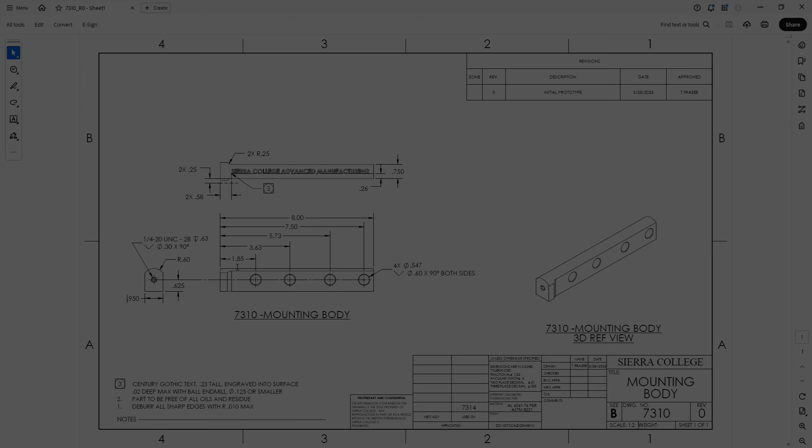Hello, this is the video tutorial for modeling the mounting body in Fusion 360, part number 7310, revision 0. We're going to model this part, which is part of a vise stop assembly.

We're going to model this in Fusion 360. Let's look at this part. It is an aluminum extrusion part, flat on two faces, has an end and a mounting point, and then a series of holes that mount to the back of different size vises with different hole patterns. This should fit, I believe, a 6-inch and a 4-inch standard mill vise.

So we're going to start off. I think the easiest thing to do is make an extrusion, and we could either extrude the end view and cut these sides out, or extrude what we see from the end and cut away the top. It's kind of semantics. I'm gonna opt for the second scenario, and we're gonna model this profile, extrude it, and then come back and cut this radius off on the top.

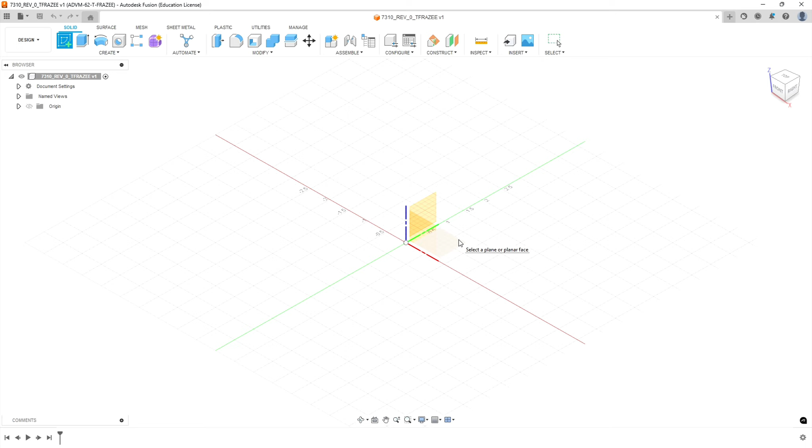So we're going to make a sketch. We'll go ahead and do that in the top view, because that's how it was in the drawing we have.

Okay, we're going to start off with the line tool. We're going to start at origin. We're going to go left. We're going to click and hold the button down so we can make an arc. Make that arc, lift up, go left, up, down, across.

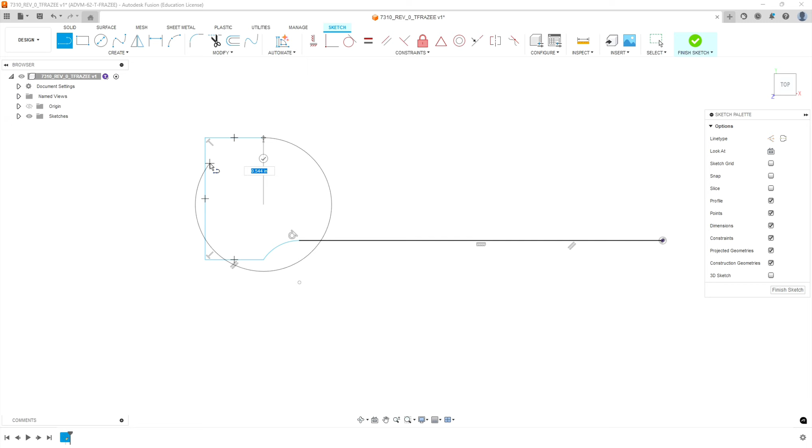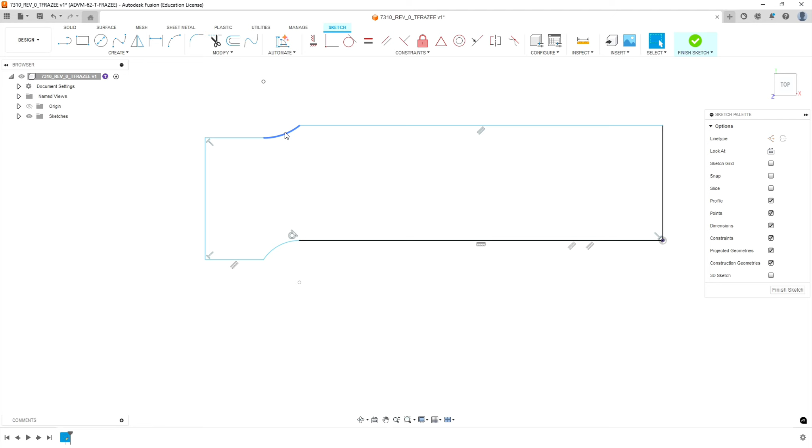Now it's defaulting to a tangent arc. We don't want that. But we can fix it. We just go back and make this shape. Let's take away the tangency where we didn't want it. Should be able to drag our arc down.

Click on the arc, click on the line, and we're going to make those tangent. Okay, so that's the basic shape.

We want to put a dimension on one of these arcs. And according to our drawing, that arc is 250 thousandths.

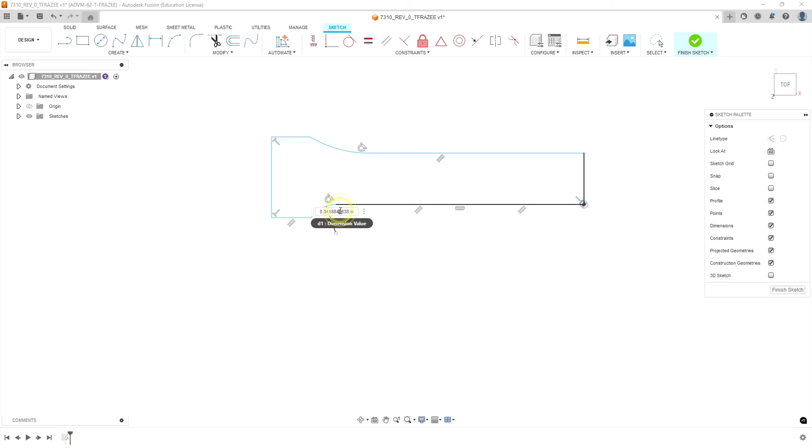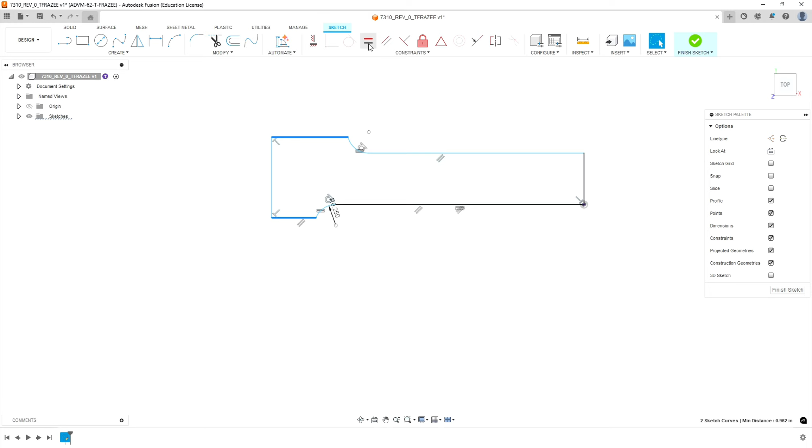Okay, and now we can go and highlight both arcs by holding the shift key down. That allows you to select multiple things, and we're going to make those equal in size. Then this horizontal line that I've just highlighted and the second horizontal line, we also want to make those equal in length.

Okay, the distance from the end of the block to the arc center is 0.58. And then we're going to put in our thickness here on the right hand side, which is 3/4 of an inch, or 0.75.

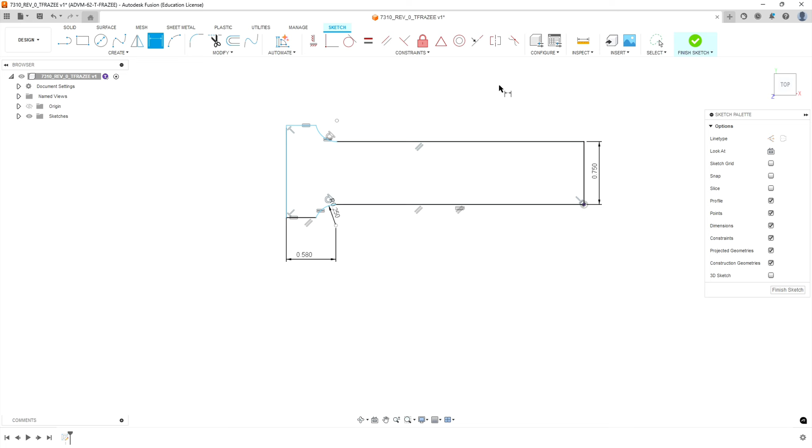And then we need to dimension the end, and that height is shown in the left view as 950 thousandths.

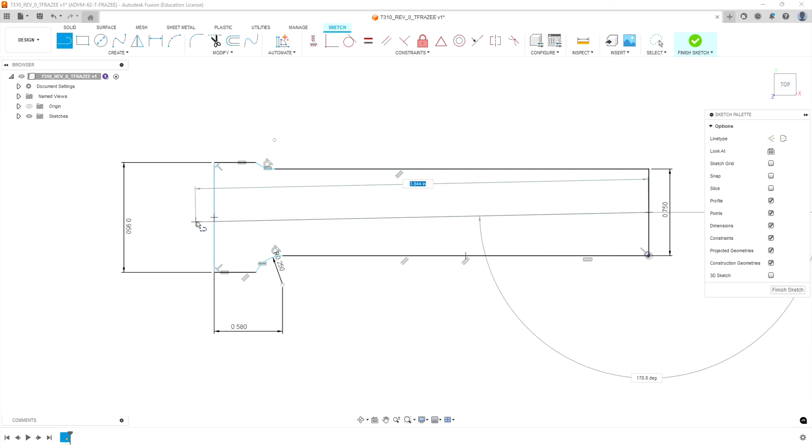Okay, so now we're going to put in a relationship. We want the center of this right line and the center of the one on the left to be horizontal. So I'm going to put a center line in here. We're going to create a construction line and then force that line to be horizontal. That'll evenly space our part here.

And the only other dimension we have left is the overall length, which is 8 inches.

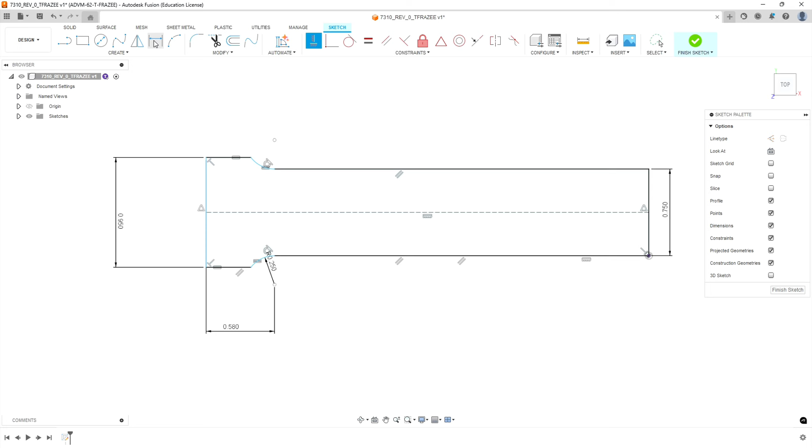Okay, so if we expand our sketches on the left, this should have the little padlock symbol, meaning it's fully constrained. You don't necessarily need all the dimensions on the drawing itself, provided it's fully constrained and the critical dimensions are there. And now we're going to extrude this.

So our part is 625 to center, and then the arc that's centered on that is 0.6. If we add those together, 0.6 plus 0.625 gives us a little under 1.25 inches. So we're going to go ahead and make our extrusion 1.25 inches because we're going to be cutting off the radius on that. So we need a little bit of material there.

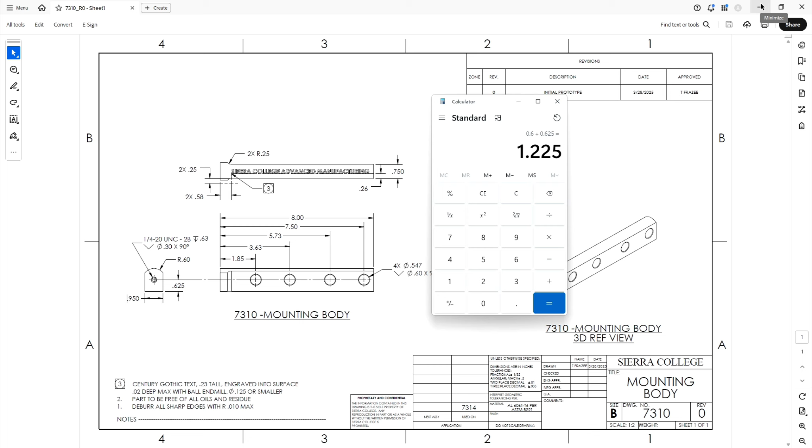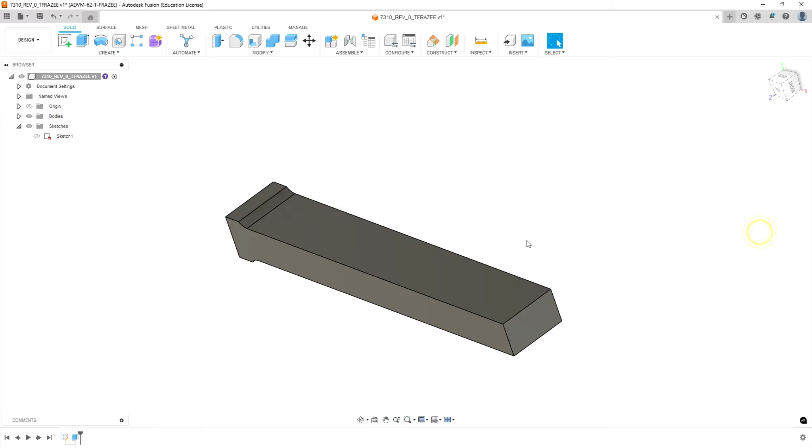So we're going to go finish sketch, we're going to extrude, and I like to go to a 3D view at this point, and we're going to go a distance of 1.25. And hit OK. So we've got our initial extrusion.

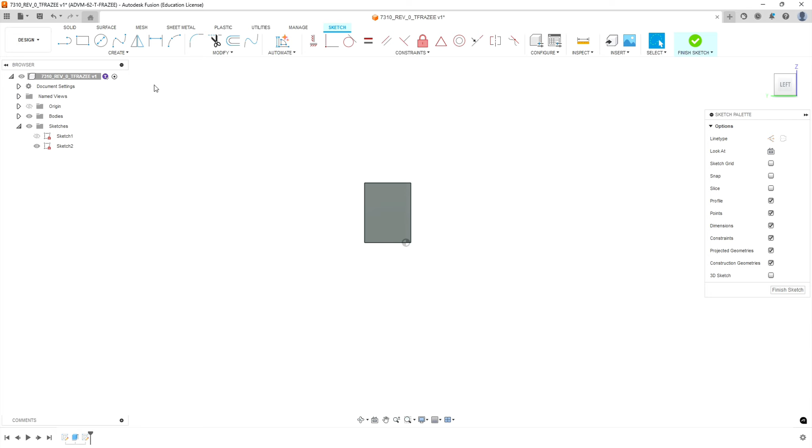Right now it's more or less a symmetrical piece. Now we're going to cut our round in the top. So let's look at it from the larger of the two views, and we're going to sketch on that face, and we're going to go ahead and draw a circle, and we're going to place that circle on the surface, hit escape. We're now going to create a line from center of the top to the center of the bottom.

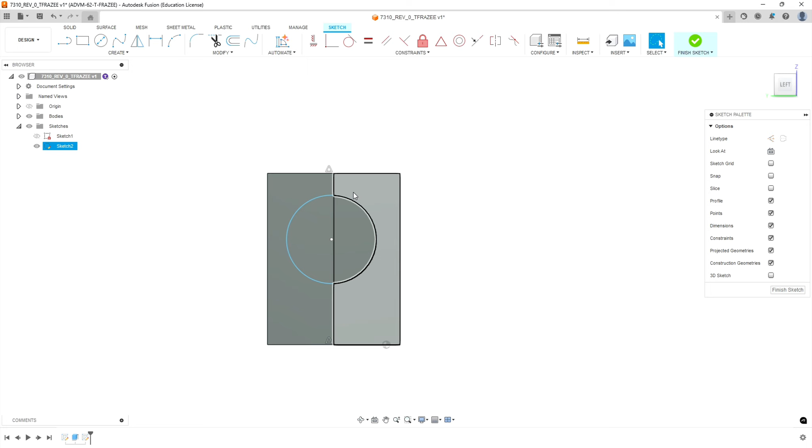We will make that line we just created a construction line. Then we're going to select on the center of our circle and hold the shift key down, select our center line, and we're going to make those two coincident. We don't want it on midpoint, we want it coincident.

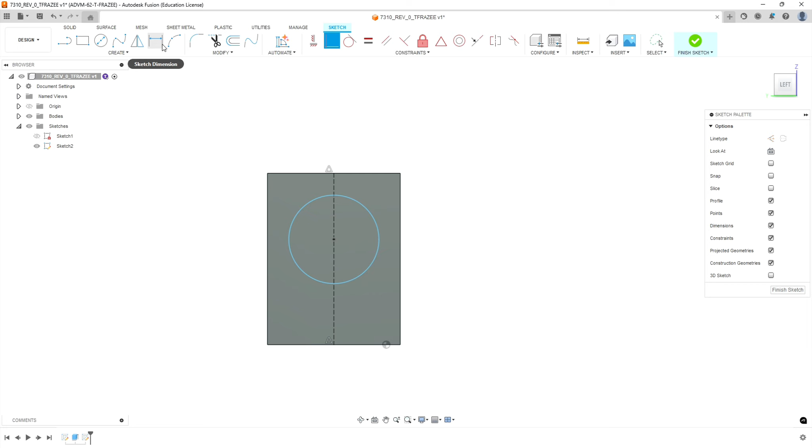And then we need to put the dimension from center line, center of the circle to the base of the part, which according to our drawing in the side view is 0.625 or 625 thousandths. So we're going to put a dimension from the bottom edge to center of the arc or circle, and it's 0.625.

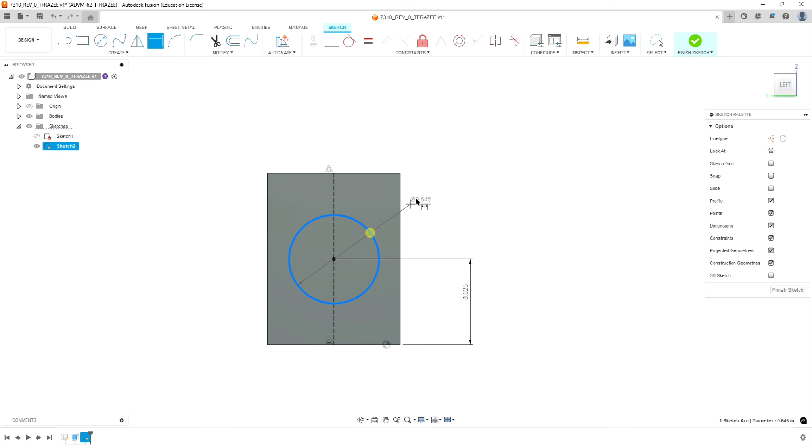Alright, now we need to set this diameter. According to our drawing, it's 0.6 inches. So if we were to dimension this with a diameter, it's double that. So 0.6 times 2 is 1.2. And that gives us the arc we need to make.

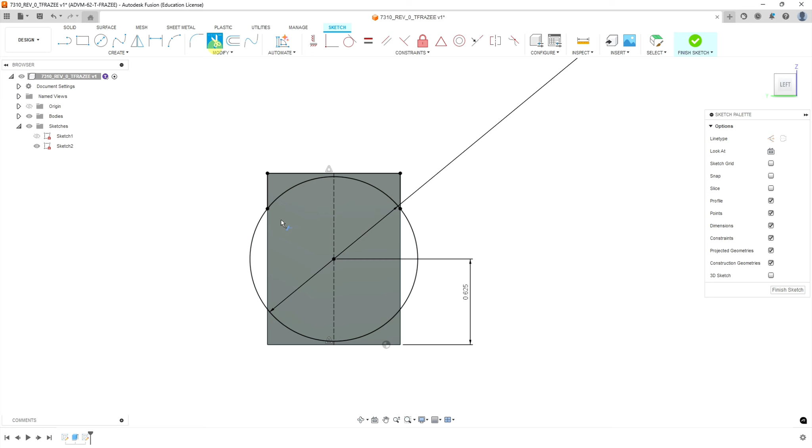Okay, so now we're going to sketch the zone we want to remove. There's a couple ways we can approach this. I'm just going to draw some lines to the model itself and intersections. And then we're going to trim off what we don't want. Now in Fusion you don't necessarily have to do that. It allows you to select zones, but it's a habit I'm in.

And it looks like I accidentally deleted my dimension, so I'm going to go ahead and put my radius back in there. And at the moment, this can be canted right to left. So you can either make a horizontal relationship between these endpoints, or you can make the legs that we drew equal in length, and that'll balance this out.

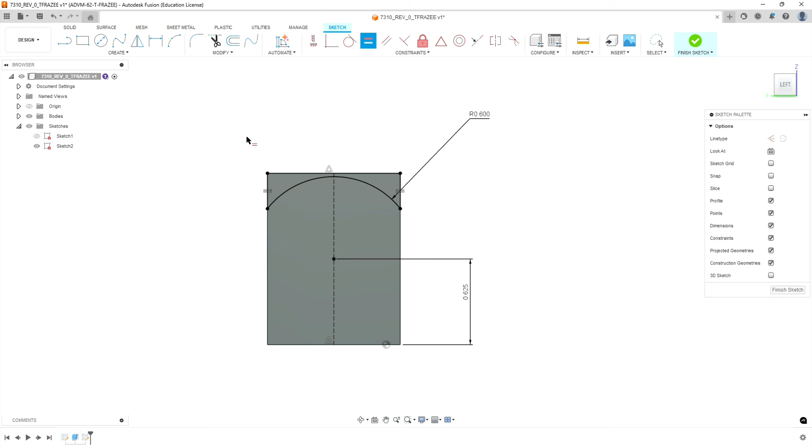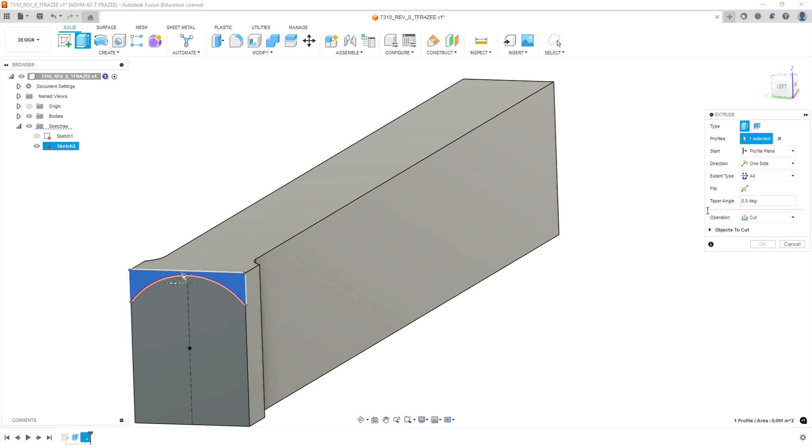We now have a fully constrained sketch. We can hit finish sketch. Let's go to a 3D view, and we could do an extrude or a press pull, but we're going to do an extrude, and we're going to select the section we want to use. It's going to be a cut, so we'll change it to a type cut. It's going to go one side, it's going to go through all, and we'll flip the direction of it. So in red it's rendering what it's going to remove, and we'll hit OK.

Okay, so we got our domed top on the part. Alright, next we have a series of holes that go through the face of this.

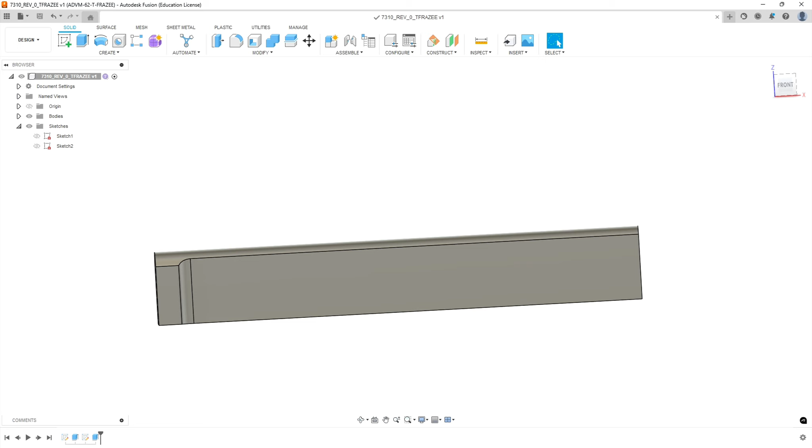So what we're going to do is take a look at that. We have 1, 2, 3, 4 holes, 4 times. They're 547 thousandths in diameter. They have a chamfer, we're going to put that on later, the chamfer tool for the countersink. But let's do these holes here. They're aligned with this 625 thousandths center line here. So let's put that in.

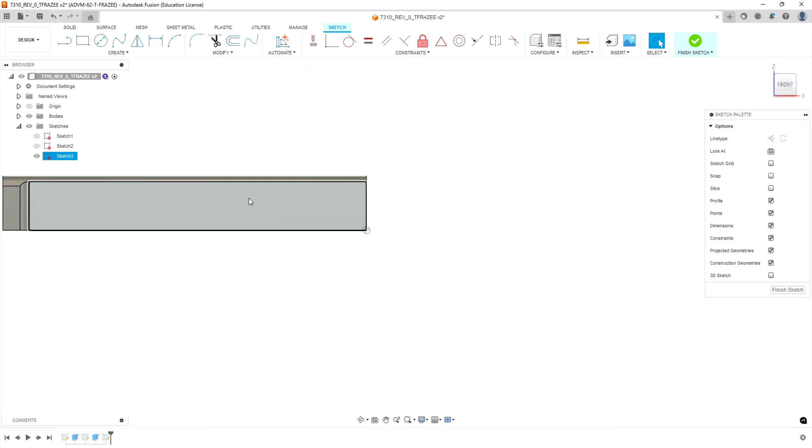So we're going to sketch on the flat face of the part. We're going to make a line from one end of the part to the other.

We'll go ahead and make the line coincident with the edge that projects. And then since we don't want this to be real geometry, we pick on the line and make that construction geometry.

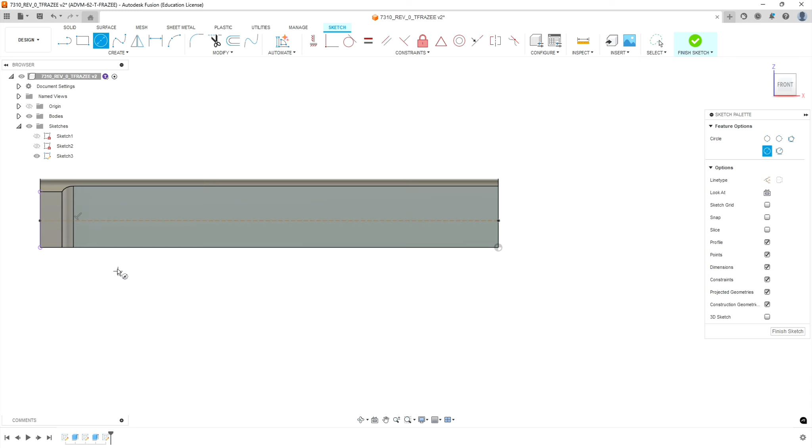Now let's draw our circles. We're going to draw them on that line we just made. You can somewhat make them arbitrary in size. At the moment, there's 4 of them.

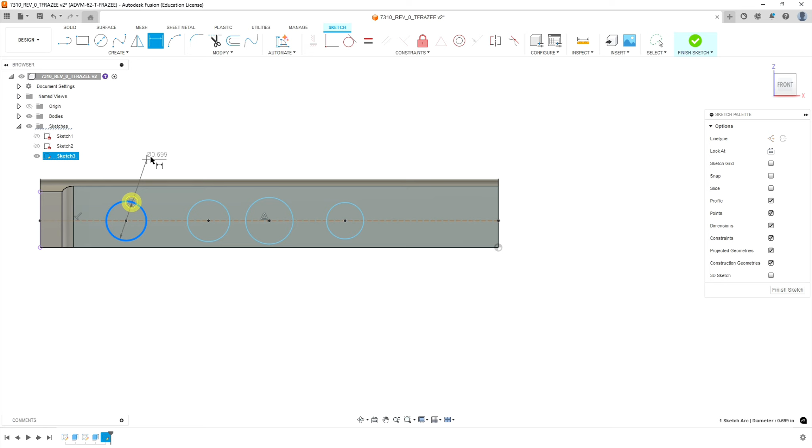Let's dimension one of them, its diameter, which according to our print is 547 thousandths. So we're going to dimension the first one, 547 thousandths. It shrinks up. Hit escape to get out of the dimension tool.

Then we're going to highlight the circle we just dimensioned, hold the shift key down, and highlight the rest of the circles and create an equal relationship between them, so they're now all the same diameter.

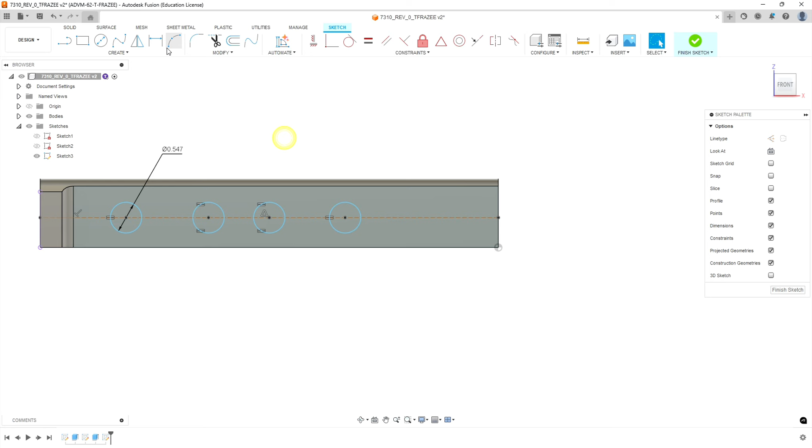Now all we have to do is put them on this center line we have here, but right now that center line can float. We need to put a dimension from the base to the center line, and it is 0.625, 625 thousandths, from the bottom, which is where that row of holes sits.

We're going to go to the mounting body, going from left to right. We have a 1 inch 850 dimension, let's put that one in, from the edge of the part to the center of the first circle.

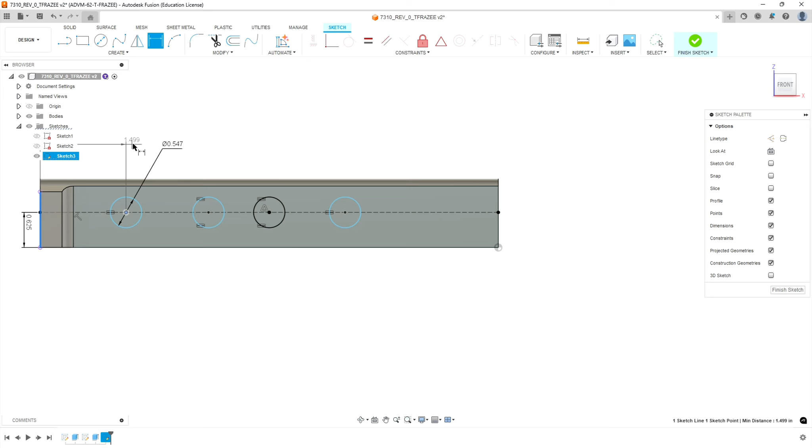1 inch 850. Looking at our next circle, it's 3 inches 630 from the end. So we're going to go from the end of the part to the center of the second one: .63.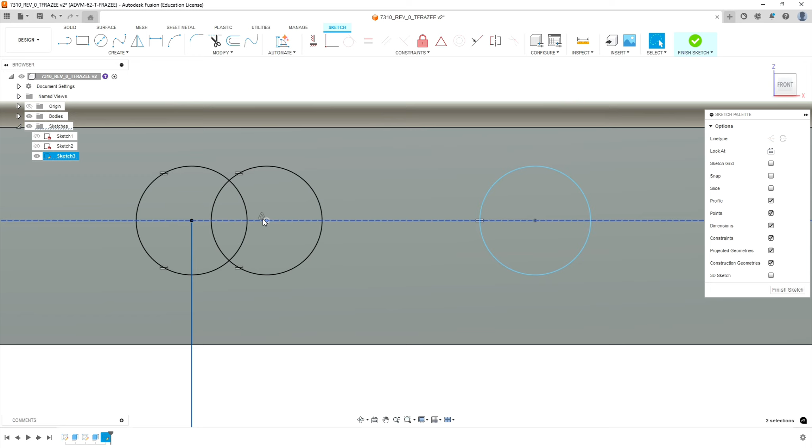Alright, our next one is going to go from the same edge of the part to the center of the next one. Looks like I accidentally got a midpoint relationship I didn't want. If that happens, just highlight the relationship and hit delete to remove it.

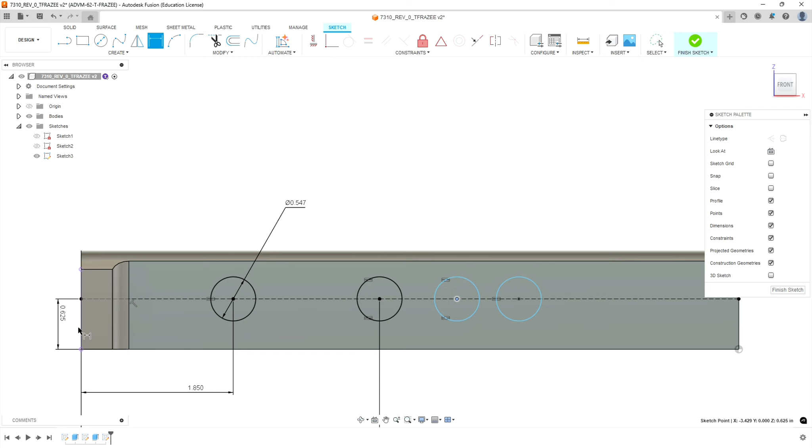We go back to the dimension tool and make a dimension from edge of part to center of the hole. This dimension here is 5 inches and 730, so 5.73.

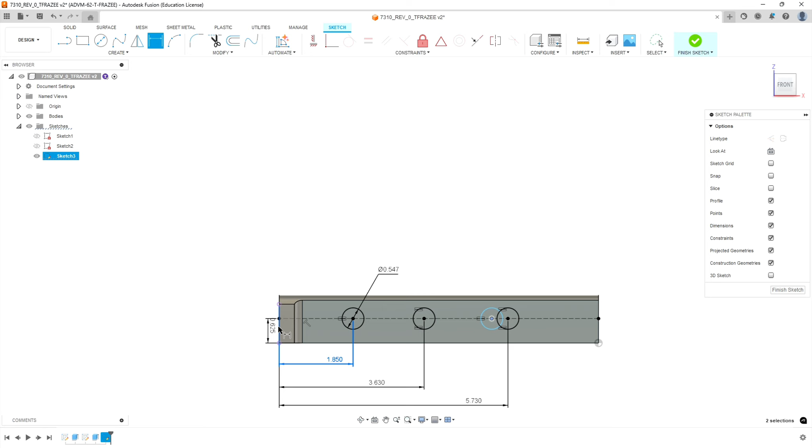We just have this last hole here. Go from there to the center. According to our drawing, that last one is 7 inches and 500 thousandths, so 7.5.

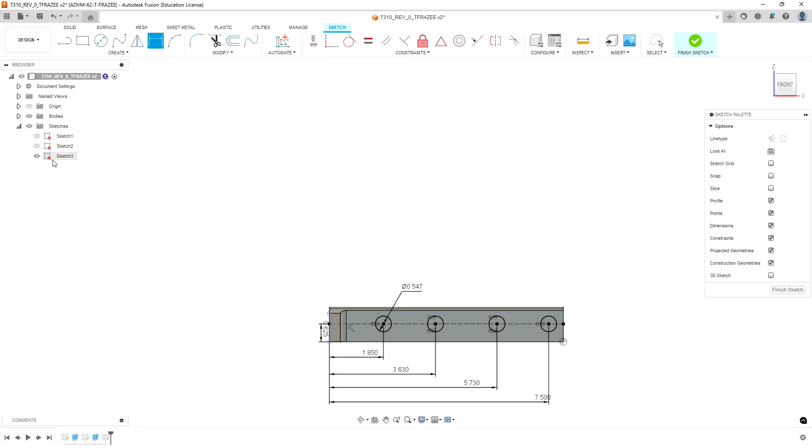Okay, so that's all our holes and their centers, and if we look to the left, our sketch should be fully constrained. We're going to hit finish sketch.

We're going to do another extruded cut, picking inside each of these zones of the circles, telling it we want to modify what's inside that circle, and we're going to do through all.

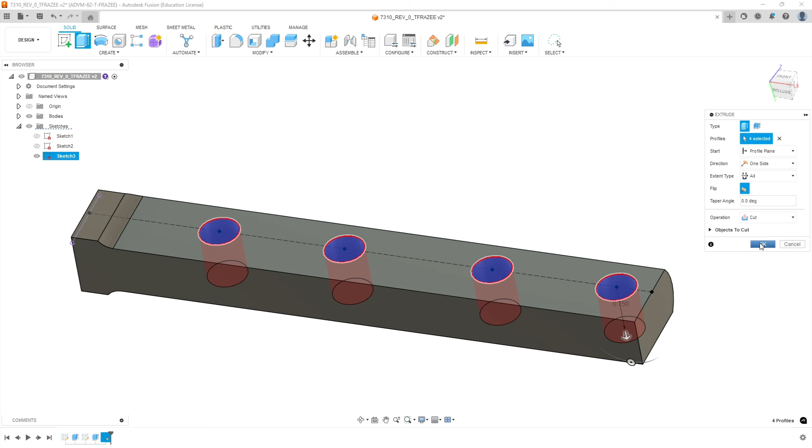We're going to flip direction, which should cause it to change the cut. If it doesn't, change it to cut and hit OK. So now we have our hole pattern.

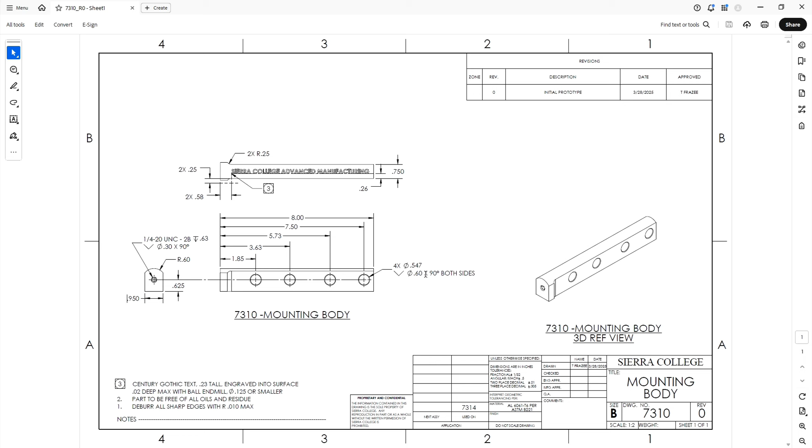Now our drawing has that with a chamfer on both sides. We could do that now, or after we put the last feature in. Let's do it now since we just created these things. So if we go to our drawing, we have a 600 thousandths 90 degree countersink.

What size is it if we're using the chamfer tool? So 0.6 minus the diameter of the hole, which gives us 0.6 minus 0.547. That results in 53 thousandths. We divide that by 2 because it splits the difference on both sides of the hole, giving us a 26 thousandths 5/10 chamfer.

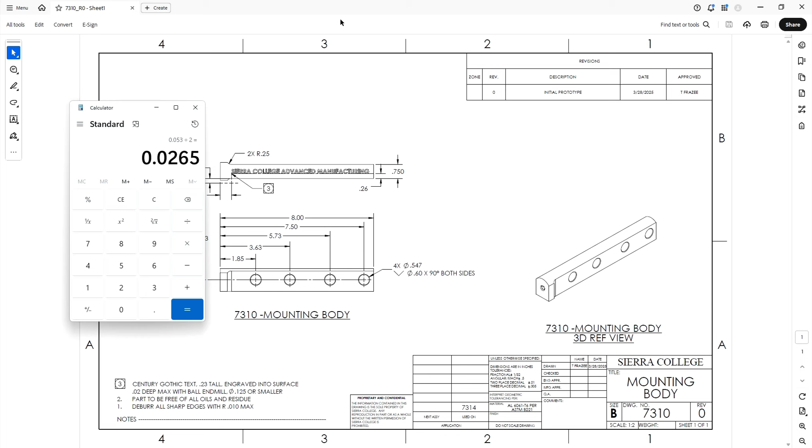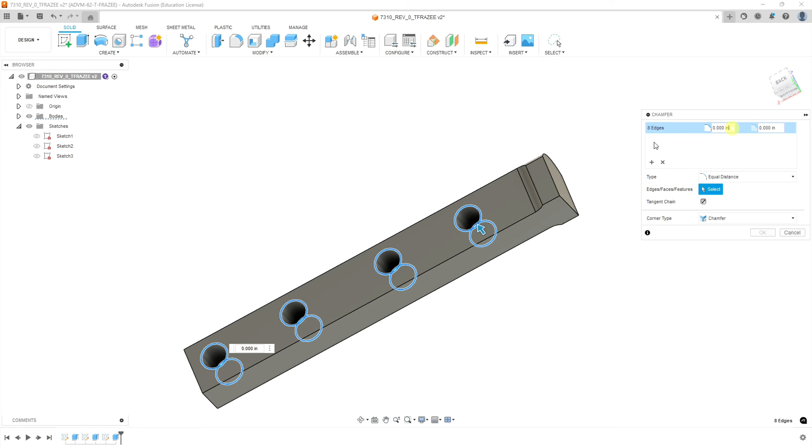You can, if you use the calculator, right click and copy that number, or remember it. We're going to go to modify and do chamfers, picking the edges of each of our holes on both sides of the part. Then we're going to set our chamfer size of 0.0265, which should give us the resulting chamfer we want.